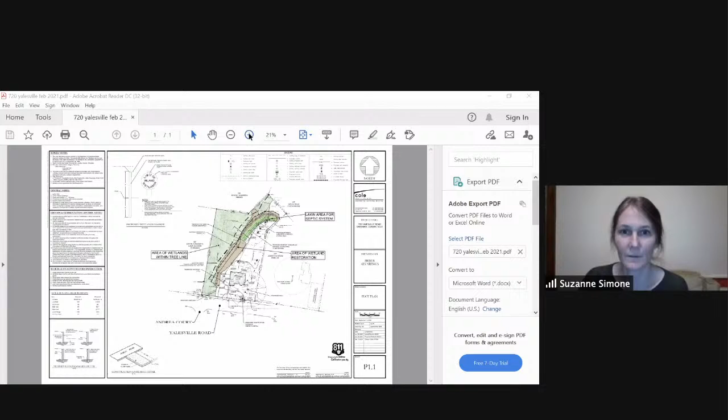Those of you who had questions last time, what do you think? Mr. Chairman, this is the site map that was sent to commission members today. The engineer working on this plan had worked on a color-coded map indicating where grass would be allowed over the septic system, shown here in the darker green. And in brown, that highlights the area that is part of the required restoration, which is part of the corrective order, the revised corrective order that's before the commission tonight. And under corrective order number 1, it makes specific reference to this map, indicating the date that the map was created.

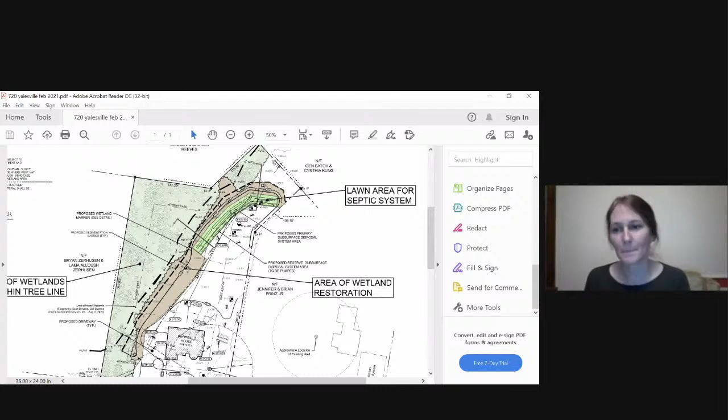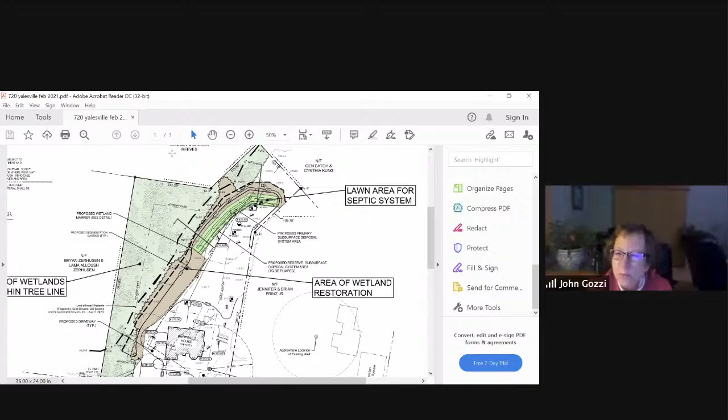I'm satisfied now with the revised plan and with the staff's proposed wording for the corrective order. As am I. So are you moving? Did either one of you make a motion? I will move staff wording. I'll second. Moved by Dr. Dimmick, seconded by Mr. Norback. Any comments? All in favor of the motion, please say aye. Opposed? Carried unanimously by those commission members present.

Talmadge Road. Suzanne, you had some notes on Mr. Krasnicki at 152 Talmadge Road. I can't find him, there was some discussion, correct? No, I do need to follow up with him and send him a letter to spell everything out for him, and try to get direct communication with him regarding the status of getting a site plan together. The commission may recall it asked to see a visual layout of the work that was done without a permit, so it could visualize it as opposed to just the narrative. From there, the commission will decide whether there's a corrective order to be issued or whether to allow them to come in for a permit after the fact. So I will send them a letter prior to the March 2nd meeting.

Is there a deadline for Mr. Brzezowski? Or is it- he has joined. No, there was no deadline given when there was discussion with Ryan McAvoy. Did you note that Dave Brzezowski has joined us? Oh yes, all right, thank you, Carla.

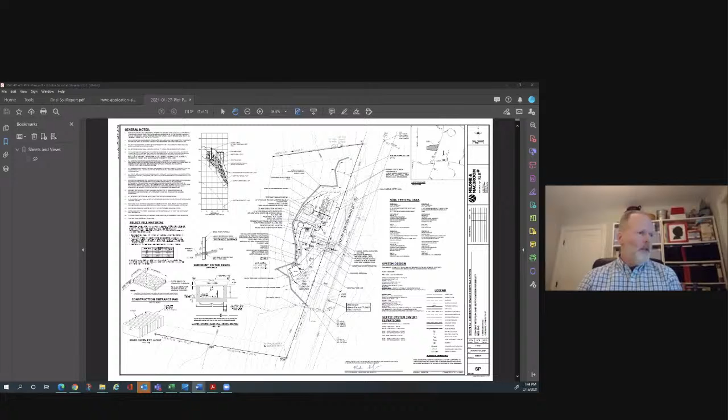We have received some engineering comments, and I'm prepared to discuss those, but at this point I'll turn it over to the commission. If there are any questions, I'd be happy to answer them now, or if you'd like me to go through the engineering comments and how we plan to address those, I'd be happy to do that as well.

Darren, if I may - on your map, you don't have the upland review area marked? Yeah, it's there. It's right here - this dashed line goes through the house and along here.

Oh, I missed that - the upland review area. In other words, the house and garage are entirely within the upland review area. That's correct. We don't really have a choice in the matter because the front setback line runs right across the garage, which is right on the corner. The house is about 3 feet off the front setback line off of South Meriden Road.

You've got a very tight situation, and it's really pushing the envelope. Under certain circumstances we allow some development within the upland review area, but this is a case where all of the development is within the upland review area. It's really pushing things.

To be honest, when I went out there to do the soil testing, I wasn't sure we'd be able to find good enough soils to fit a leaching field out here by the house. I was surprised by these two test pits and the perks we ran on the northern part of the site. The Yalesville soil was better than expected, and we were able to fit it in, but we recognize that we really can't fit these in here without significant encroachment into the upland review area.

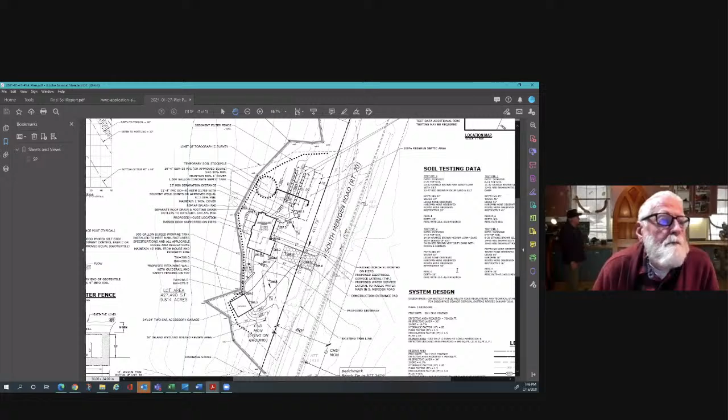And even at that, you're hitting mottled soils at 32 inches in test pit 1 there. I recognize you're planning to put in fill for establishing the septic system, but it's still not ideal conditions even there. And as you probably remember with Yalesville soils, every once in a while you'll put one down and hit weathered bedrock right in the middle of where you thought you had good soil all around it. So one test pit doesn't necessarily prove that it's all good.

So we got down 96 inches in test pit 2, and we went down 77 inches in test pit 1.

Test pit 2 is closer to the road and not where you're planning to put the septic. So that is one of the comments we're working through with Chesprocott. They want an additional test pit down gradient of the leaching field, and we're also planning to do one more over here.

So they probably have the same concerns I do then. Well, they want to see the conditions in the receiving soil within 25 to 50 feet down gradient of the leaching field. And then we also wanted to get a little bit more coverage over here to see if anything changes.

I also would love to see a little more room for some buffer between the actual structures and the wetland. Admittedly, you're staying out of the wetland, but you're pushing it awfully close there. And in this case, everything is sloping down to the wetland from every direction. In its present condition, you do have the shrub growth, which is buffering the runoff from the highway,

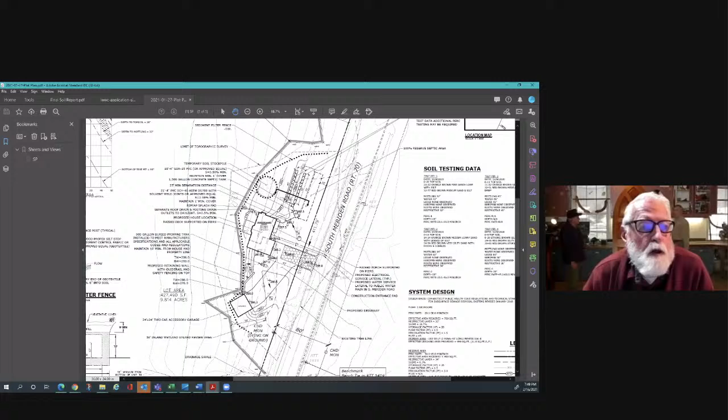Now here, what are they gonna do, move the living room couch in front of it? The only precedent I can think of where we allowed things to get this close was one we approved for John Malone many years ago, but he had it where his backyard gradually became wilderness as you approached the wetland. So he had a situation where, first of all, the house wasn't nearly this close, but it did approach in the upland review area, and he had it planned so it became a gradual blending into the surroundings. Other than that, normally this is not the sort of thing we do.

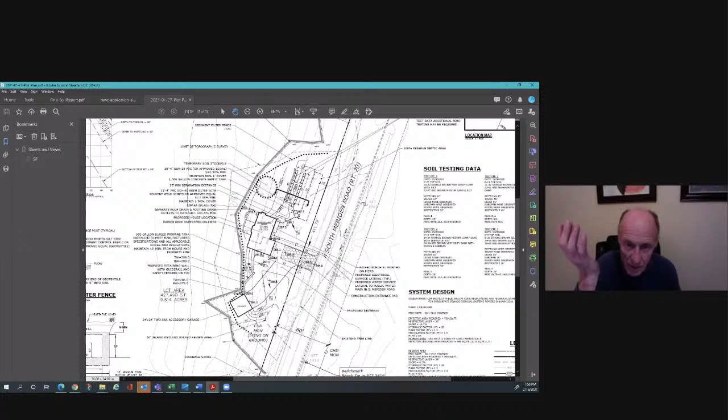There's only about, from what I can see, about 60 square feet of the structure that are outside of the upland review area, if I'm reading this right, if that. There's going to actually have a few feet or so that's not in the upland review area. And you have to worry about doing the construction, making sure that some vehicle doesn't wander into the wetland, because you normally don't build a house from just one side.

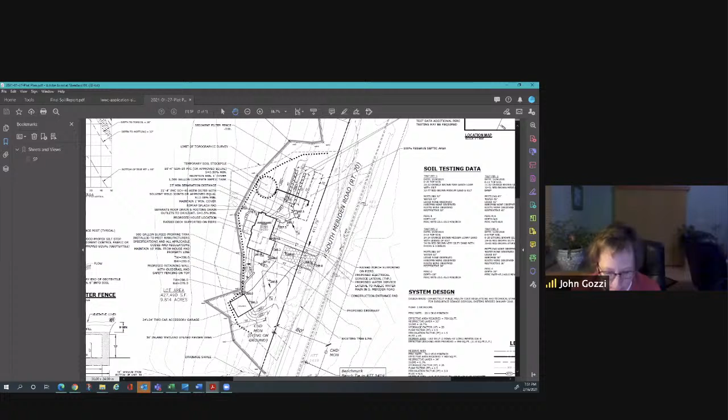I would suggest reading, there's actually a case that's pretty much on point, which Dr. Dimmick probably knows, Rano versus Cheshire Inland Wetland Commission from 2009. That's where the application was denied. I think it was because, I can't remember now, maybe Suzanne knows, I can't find my notes, but it took away something like 50% of the upland review area. This is pretty much building in the upland. It's in that case, it was less than in this case. And they upheld the denial of the application. It's Rano, Ranno, and it's our Cheshire Inland Wetlands Commission.

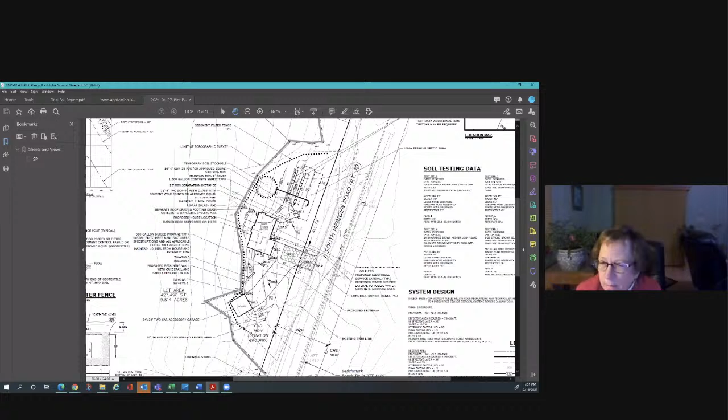So what we have here, like I mentioned before, it's a 9.8 acre lot that has 8.6 acres just of wetlands on it. And as far as the wildlife, the good thing about the upland area is that it's right at the frontage, so we're not trying to cross wetlands to get to an upland buildable area of the property. As far as wildlife, I don't think there's a lot of great wildlife habitat right on the frontage of South Meriden Road. The front part of this lot, I believe, was probably farmland at one time, which is why we see that scrub shrub, and it's kind of reverting back to a wooded nature now. So, that's one of the benefits.

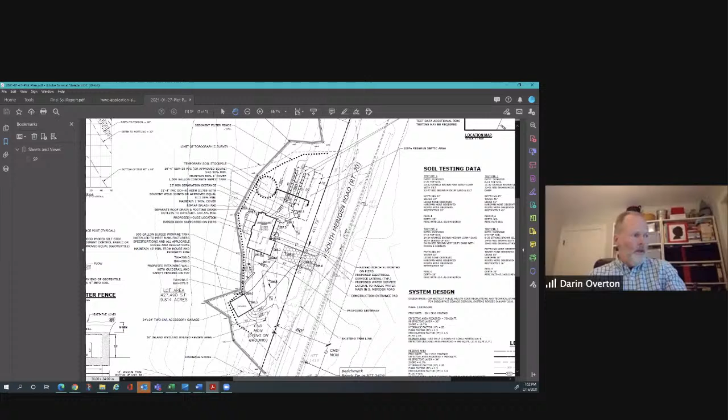I know it's hard to get past the amount of upland review area disturbance, but we still have 8.6 acres of undisturbed area, even more than that, because we're not disturbing any of the upland on the south side. If you want to consider the surrounding wetlands, you have about 65 acres of undisturbed wetlands on the adjacent property. This is all a small part of a very large wetland.

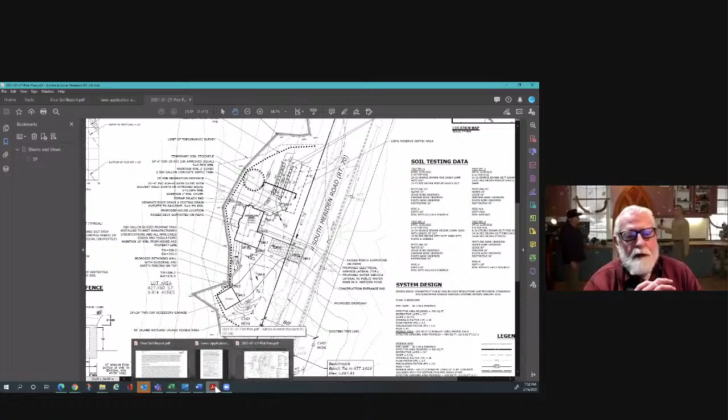I'm not sure that's a point in your favor, though. Well, wasn't this all part of one parcel at some point? Oh, yeah. So it was subdivided in such a way that it left a lot with the vast majority of it being wetlands. That was the piece they thought they couldn't develop when they cut up the rest of the property. Well, how about that?

I don't know how this came to be or what property it may have been divided off of. As far as I can tell, this has been in existence the way it is for over 30 years. I'm trying to remember back, because I've been around on this longer than that, but it escapes me.

So Charles, I remember my lone lot over on Half Moon Road. I think what we did there is we planted some of a shrub buffer, and put up some split rail fence to define the limits of disturbance and define the wetlands. And the property was almost flat. The applicant will be willing to do here.

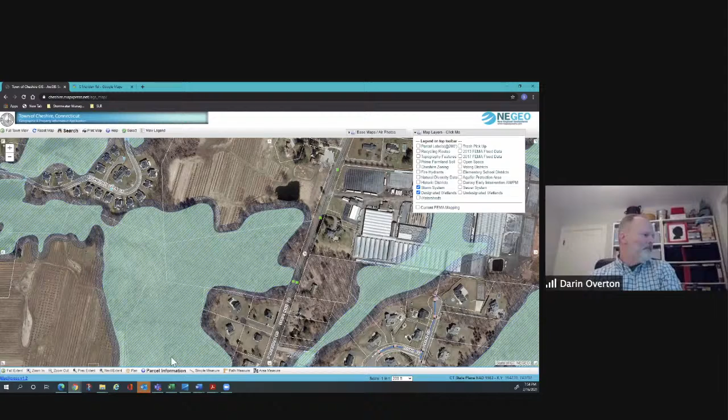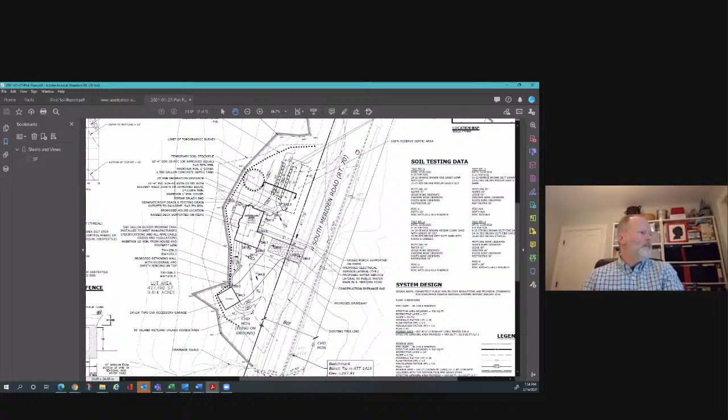Do we get an opportunity to get some of these questions and suppositions we have answered, like a public hearing? We could decide to have a hearing based on the proposed activity possibly having a significant impact on the wetlands and watercourses. Yeah, number one.

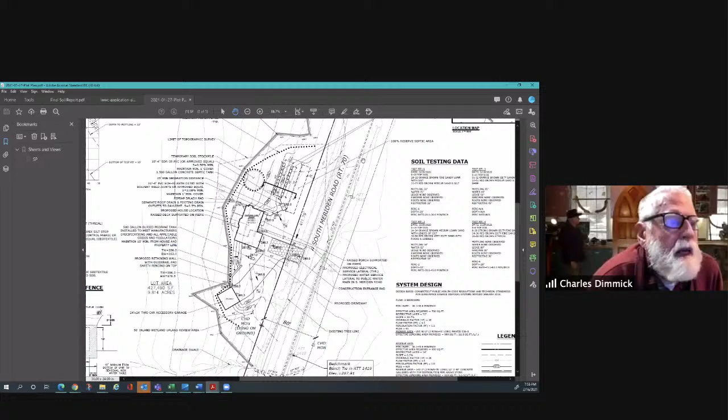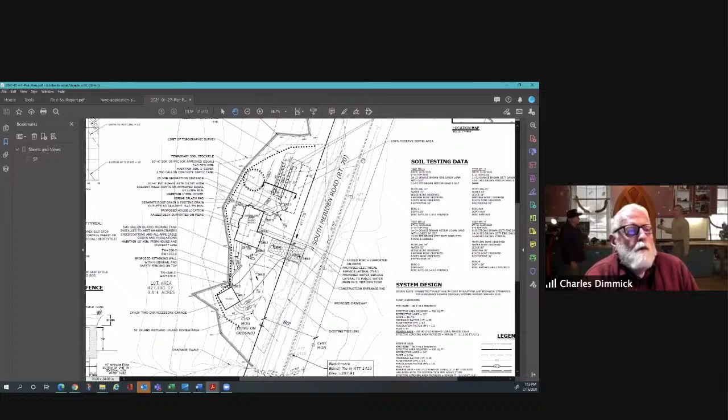9.1A. I will move to schedule a public hearing on this based on potential adverse impact to the wetland because of the nearness, based on 9.1A of the regulations, and for the possibility of considering alternatives to the proposed development, which is 9.1 -- I can't remember what part it's in there somewhere.

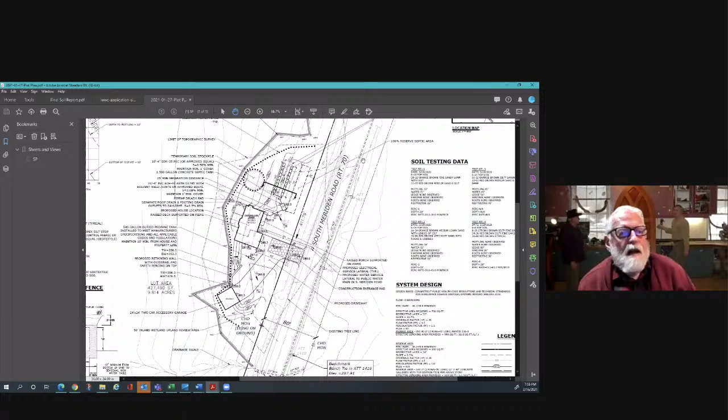Is there a second? Second. Proposed by Dr. Dimmick, seconded by Ms. Dunn. Any discussion? All in favor of the motion, say aye. Aye. Opposed? Carried unanimously by those commission members present.

Darren, do you know what we're getting at? Do you know these things that have to be addressed? Even with Chesprocott, you say you've applied but you haven't gotten an answer. A lot of things I think need to be squared away. You need a list?

So certainly 9.1A, we can look at the requirements under there. Dr. Dimmick mentioned alternatives, we'll look at that. We obviously didn't expect to get an approval tonight, so we figured we'd have some time to do the additional testing and get an approved plan from Chesprocott, which we will continue to work on. Is there anything else the commission would like to see in regard to this?

Wildlife impact -- go ahead, Dr. Dimmick. I say we need a little bit more on wildlife impact than what has been suggested, because this is on the edge of a very large and very productive wetland. The wetland itself, as you go off the property, has quite high environmental values. So we need some input from a professional as to just what the expected impact might be on it.

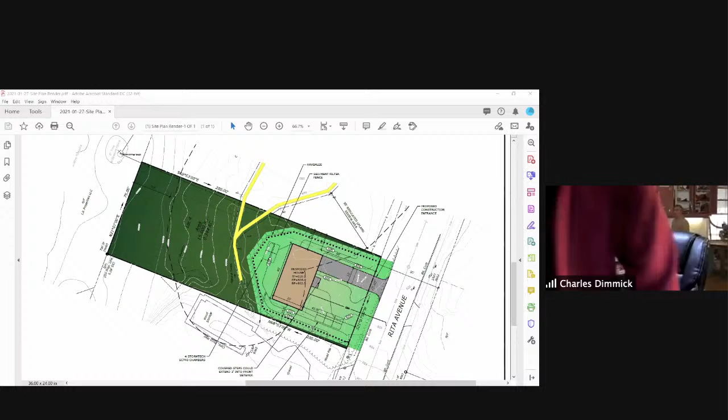Is that something you're evaluating based on the engineering comments? Yeah, that's based on the engineering comments we received from Anchor. We're addressing all their comments right now. Like I said, the soil scientist report we'll get clarified, and then we are going to work on getting some above-ground rain garden type feature. The other comments we will address as well.

Did you also have some vegetation acting as a buffer in the back there? So the site is currently wooded up to the street line today, so we're leaving about 8 feet of vegetation between the edge of the wetlands and the yard area that we have shown today.

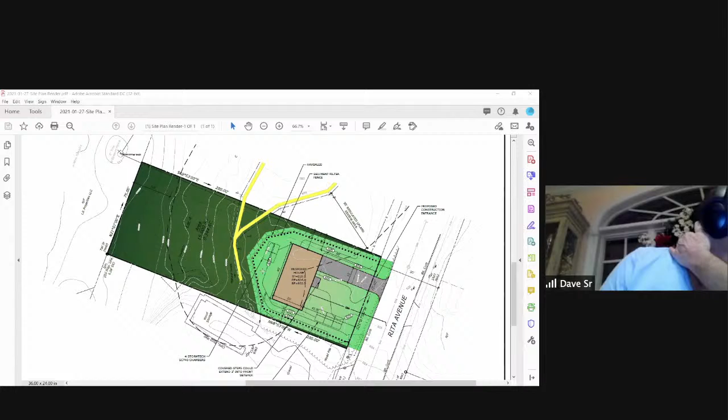We definitely need more information to be provided. Should we just take this up at the next meeting, or do you think this should be subject to a public hearing? Get some more information and then decide about a public hearing. Yeah, I think let's do that, we have time to do that. I think we need a little more input. I'm not nearly as worried about this one as I was the previous one, but I'm still not sure we have enough information to go forward.

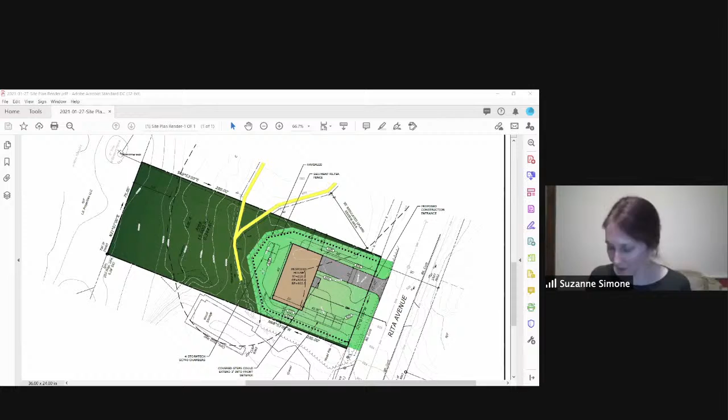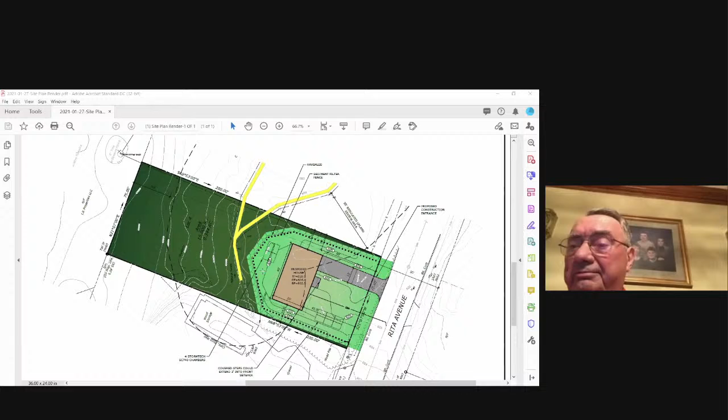The commission does have until the next meeting to decide to hold a public hearing. So the commission would have to decide at the next meeting at the latest. We'll have the information before then, what we need is more information anyway. We don't have to have a public hearing, just have at the next meeting more presentation for some of the questions that we had. Mr. Chairman, do you guys have any questions from the commission besides the outstanding comments from Anchor Engineering?

I'd like to have a little bit better description, other than saying it's wooded, of just what the area is like between the proposed house and the wetlands. Normally we do a field walk, but it's not necessarily the best weather to see what's going on, with more snow predicted Thursday and Friday. So, a description of the vegetation remaining on site, what that would consist of, and what the wetland margin itself actually looks like.

I don't ever remember visiting this one. I've visited half the wetlands in the town, but I don't think I've ever visited that one.

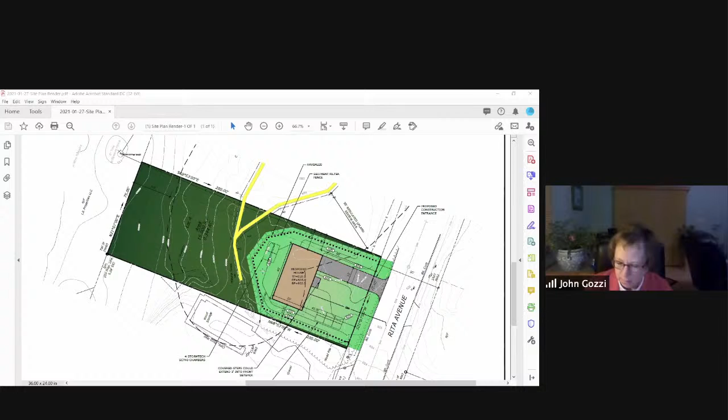I think your soil scientist, just like in our last one, said there's wildlife habitat here in discussing the functions. If you have any more information about that. Wildlife could just be squirrels for all that matter. Could be, I just want to be real clear about it.

And the soils in this area are all shallow to bedrock, as I remember. Actually, there are bedrock outcrops near here. Yeah, so that's correct.

So this lot would be on sanitary sewer and public water. Now, have you gotten the approval for connection to the sanitary sewer yet? We're working on that process with Anchor as well. This might be on a piece of the sewer that actually goes to Waterbury, so there's a little bit we have to work through with them. That upland, the Cheshire Highlands, at one point had a problem getting connections. I thought that was solved about 8 or 9 years ago. I spoke to the consultant a few days ago and they were working on finding out exactly what they'd like us to do to apply for that. So we are working on it, though.

Even though we accepted this application at the last meeting, we didn't actually get to see it at that time, it just had come in. We hadn't gotten a map or anything, so this is all brand new to us tonight in terms of getting information.

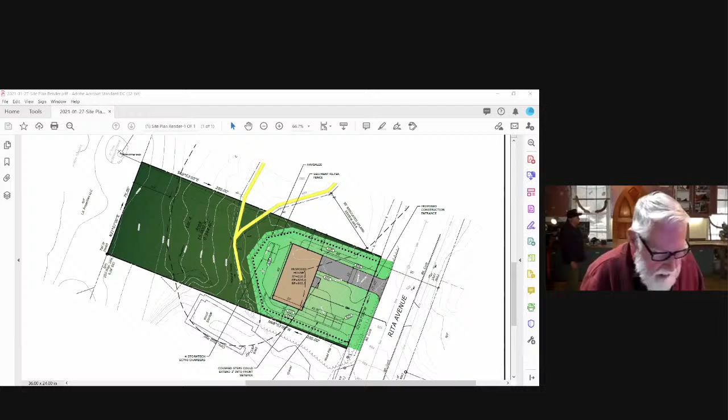Aaron, what was the underground storage you were talking about, and you said it was replaced? Could you give a little more detail? On this plan I have up on screen, we had proposed some underground storm chambers, plastic chambers with stone, in the backyard to collect roof drains from the building, and some in the front to collect roof drains from the front of the house. But the consultant engineer was correct that a rain garden would work a lot nicer for this site and be a better overall finished product. So that's the path we'd like to move forward with.

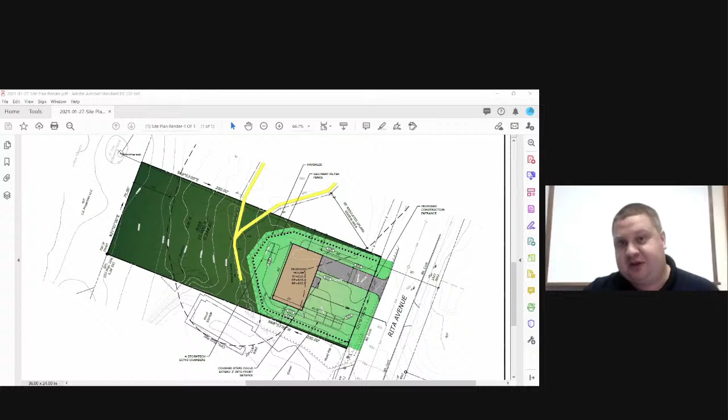So there wouldn't be collection and storage underground for the water runoff? No, looking at this plan, we would remove these chambers in the back and on the side. What we're thinking now is some sort of rain garden along the side of the property, collecting the front yard driveway area and the roof drainage as well.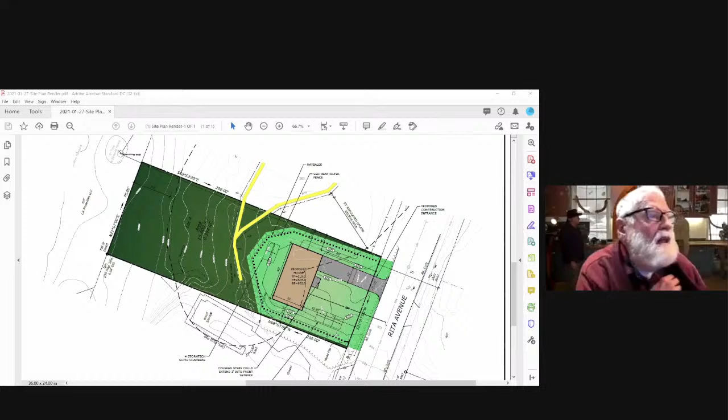Okay, anything else for tonight, or should we continue to the next meeting? I think we need to continue to the next meeting with more information coming in the meanwhile, and a revised map. Sounds good, we'll do it. Thank you guys very much.

Okay, new business. A permit application for Chow Ting Wu at 1530 Notch Road, and this is another one we're not going to discuss tonight, we just have to note that it's on the agenda. The date of receipt is today's meeting date, February 16th. This will be discussed at the next meeting.

Is there any other new business to come before the commission? No, there's not. We have nobody to talk about, while we're on air. No.

No, other than welcome again, Tim. Good to see you. We'll shake hands at some other time.